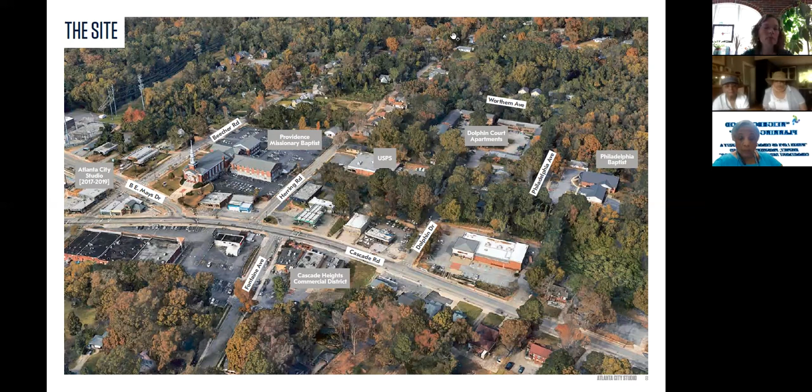This ties back to the site, which is really the Cascade Heights Commercial District. As we think about housing, how are we also ensuring the continued success of this commercial district? It was great to see so many businesses open their doors while we were there, and we were happy to play a role through our storefront redesign program. As you think about growth and our other successful commercial districts throughout the city, what role does housing play? That was another question we were asking ourselves.

The concept here - this is a diagram on slide 10, and I'll do my best to mention slide numbers as we go - is understanding how the commercial district works today. In the middle of the diagram is an icon of buildings representing the commercial district. Cascade Road is the major corridor passing through, surrounded by amazing single-family residential neighborhoods, with Greenwood Cemetery there as a reference.

If we look at other commercial districts around the city, one thing that really drives the success of those businesses - and I'm sure many of you have heard this - is rooftops. That's difficult when you're only talking about single family. So what we were looking for was what element of multifamily could be introduced in the right way to help ensure the success and continued growth of that business district. This is an idea that proposes how that could work.

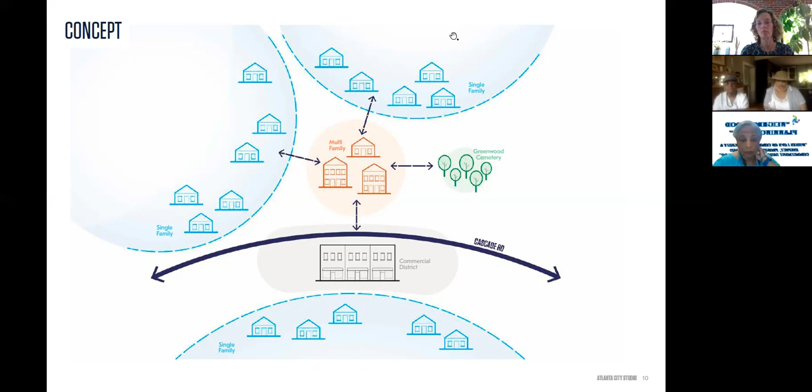This all started when we were in the studio. The Cascade Heights Community Development Corporation - and I'll pause here to let one of their members speak - was very interested in advancing this, and spent a lot of time over summer 2018 understanding how the commercial district works, how it's put together from an urban design standpoint, how the streets work, and what housing types exist. Thinking about the first statement of Cascade Heights as a community in a park with tree canopy, how are we looking for new housing options in a way that protects trees and really protects the identity of the community?

As we worked through those ideas, starting in the first part of 2019, we held a number of meetings similar to this one, only in person in our studio space, which we miss a lot these days. We did one specifically with the property owners north of the commercial district, where we focused the design recommendations, and a couple with the community at large to introduce the idea and hear people's feedback and comments on the design ideas.

A lot of that feedback fed into refinement that brought us to the rezoning we were proposing earlier this year. It's something we've worked on for a long time, and while there have been comments on both sides, I feel it was generally well received because it was so rooted in the community's plans and something we'd spent a lot of time talking about. We're happy to continue having these informational sessions because we want to make sure everybody hears this.

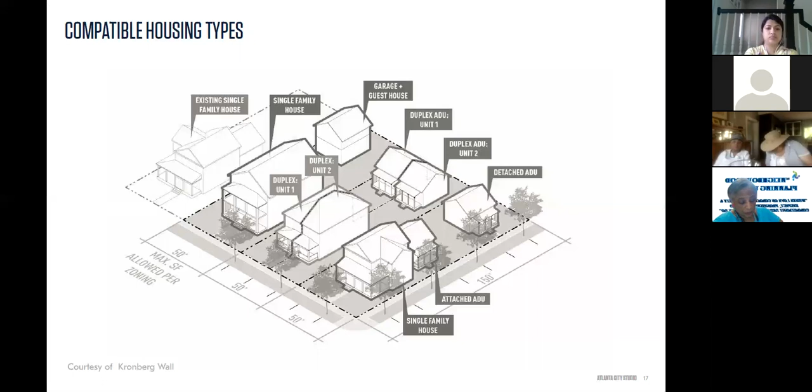Moving on a little bit to visible front doors, there's a relationship to how all of this works best. And I think for a lot of people on the call, this is probably going to seem almost silly to talk about, but neighborhoods work best when you have front doors facing front doors. It's kind of the thing that makes the active street front. It aligns all of the driveways. It dictates where the trash goes. It all works pretty well. And for the most part, we do that. That's been a common planning technique, subdivision technique for decades, if not centuries.

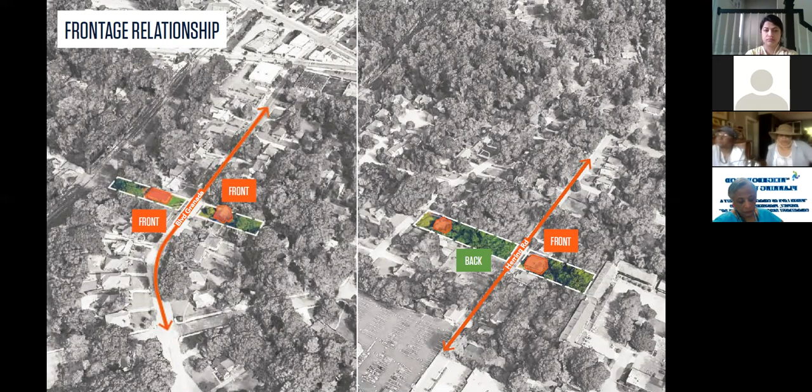The problem is in Atlanta, and some of it's due to topography, some of it's due to just the unfortunate history of zoning, with some of it, we're not going to beat around it, some of it's racial motivations. You find that we have fronts facing backs, and the issue that causes is that you basically have incomplete blocks, and you have whole sections of streets where you don't have eyes on that, and it kind of falls into no man's land, and we get into issues of always having to rely on code enforcement or somebody else to deal with these, where at the very beginning, if we could just get this very simple condition set up, then it all works much better.

Kind of highlighting one of those issues is Herring Road, and we'll get more into specifics about this later, where you do have front yards facing backs and some really deep lots on those properties between Herring and Beecher, and you can kind of see what that condition looks like.

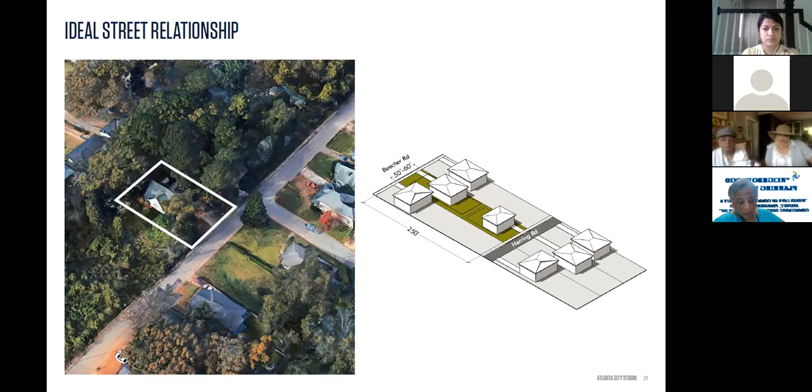Ideally, what you would have is fronts facing fronts, and actually, on Herring Road, it's not all fronts facing backs. There is one little house, I think at 2337 Herring Road, that kind of figured out what we would propose happen here, and change some of those really deep, long lots, and correct that frontage condition. It's a condition we see throughout our city - it's not uncommon, it's just that we're actually trying to find ways to correct for that here.

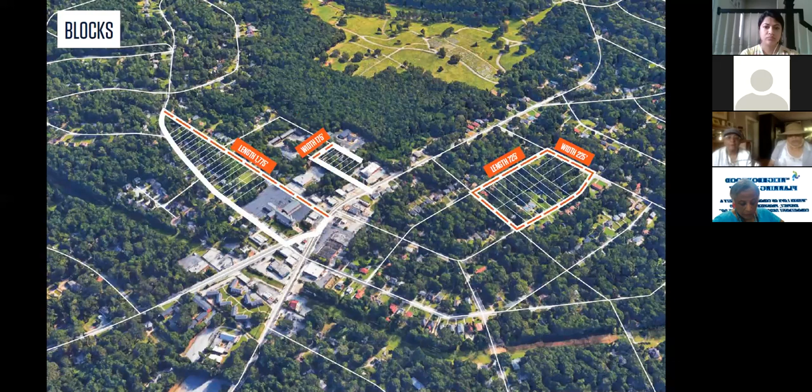Here we're getting into a little more depth. We're on slide 24, where you can actually see the property lines. If you look to the right hand of the screen, a block that's about 700 by 200 shows how you're able to get those nice standard lot sizes where the backs face the backs. Then on the left-hand side, you see Herring Road, where you have a really long block with a lot of backyards facing - that also just doesn't, it could be a better walking experience along that street.

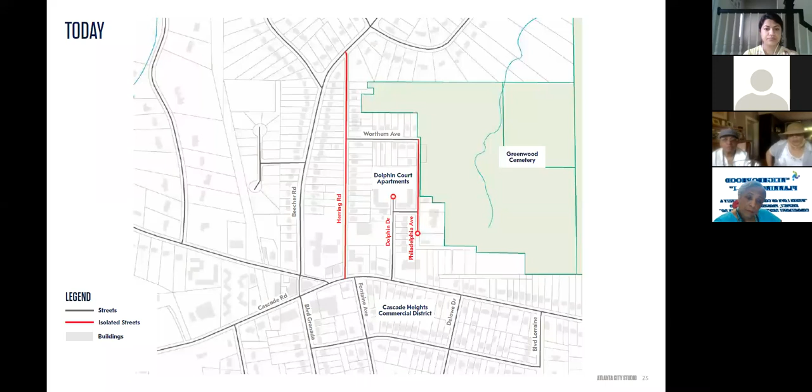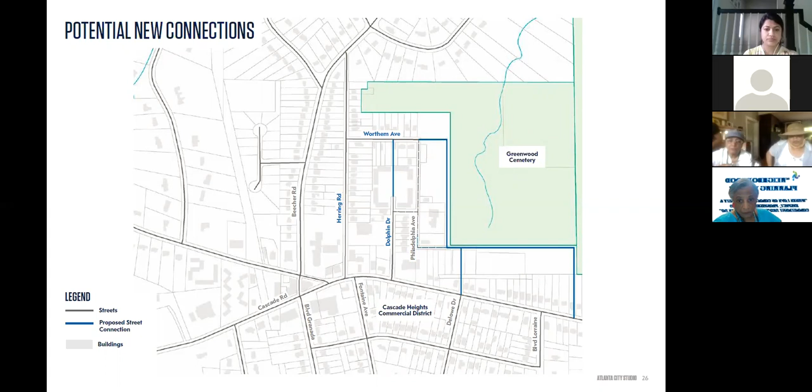So what we're thinking about, and this is maybe getting ahead of ourselves a little bit, is understanding how these streets work today, where you've got these offsets and weird disconnects, and really thinking about, on this next slide 26, the blue streets here - where might you have an opportunity to extend streets or maybe even build new ones that set those block sizes and shapes up to match the rest of Cascade Heights and create opportunities to establish a better pattern for housing as well as those front-to-front relationships.

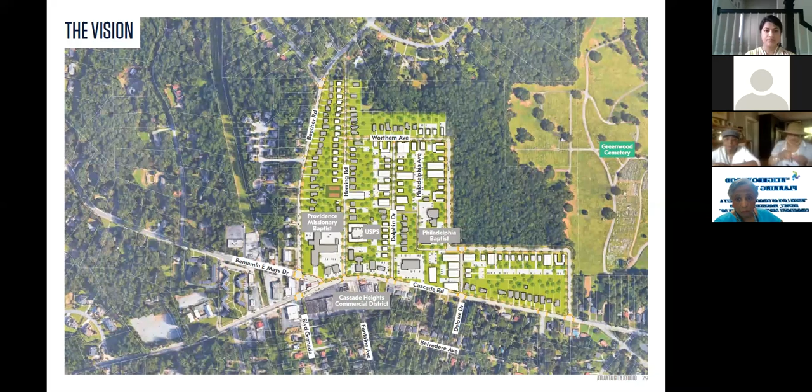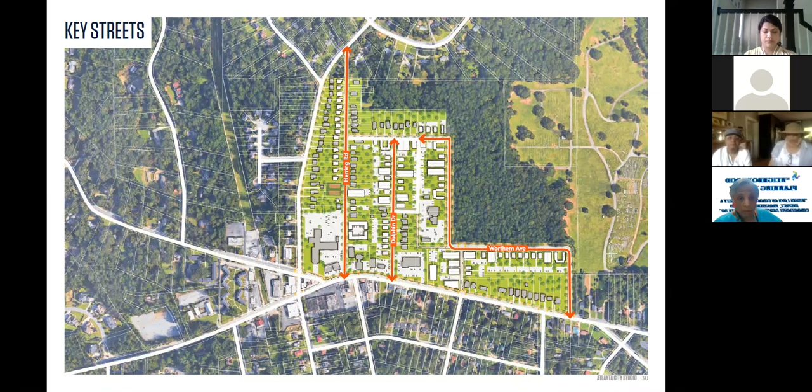I'm going to break this into some pieces and talk through it. I got ahead of myself a little bit on slide 30, but we're just showing those big street ideas. Herring Road is still there, but we have ideas of how you correct that front-to-front condition, the extension of Dolphin Drive to Wortham, and even the idea that Wortham could be extended and brought back all the way to Cascade Road for some really big ideas about the park.

We've broken this into steps, and some people might jump to calling these phases. This is not a master development plan. We are not a developer. We're not starting this tomorrow. This is just an idea of how this could work.

We tend to think of these things in bite-sized chunks. If you were to start somewhere, what's the low-hanging fruit? What's the easiest part of this? What's the hardest part? What are the biggest lifts? If you're taking a test, don't start with the hard questions first. So we tend to think about Herring Road as being the biggest first opportunity for this.

We also have some ideas as you get closer to the commercial district. We talked at the beginning about those big multifamily types, the apartment buildings, four stories over storefronts. If you really wanted to do those, that really wants to happen within your commercial district, looking for the big properties you already have down there.

There was a lot of discussion about, well, what if the Postal Service leaves someday? Maybe that's an opportunity for that, and that makes a lot of sense. You put the most rooftops or the most housing units closest to the core, and then step down the scale of the housing types as you get into the single family neighborhoods.

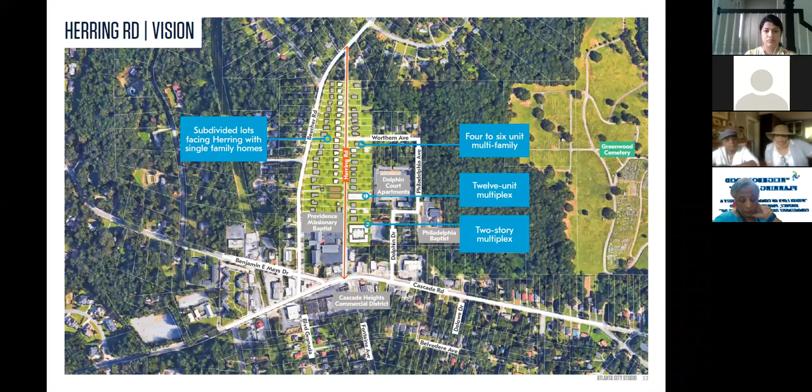Switching to slide 33 and seeing the illustrative or rendered plan over the top, you can see how that works. There's an opportunity for properties between Beecher and Herring to be subdivided or split into two properties. We'll talk more in the second part about how that could work, so you get another row of single family homes, just like our friend at 2337 Herring Road who already figured that out. We've been trying to figure out how they pulled that off, but it sets the pattern we're looking for.

Then maybe in the areas between Herring and Wortham and Philadelphia, you go to the next increment of housing, those duplexes and quadplexes we talked about, and even something up to a 12-plex if that's what the neighborhood wanted or what the market was ready to bring to the table. We're not necessarily saying we've figured out every parcel and every building, but there's flexibility that could be done with zoning to allow some variety, and some restrictions if that's what we want in place.

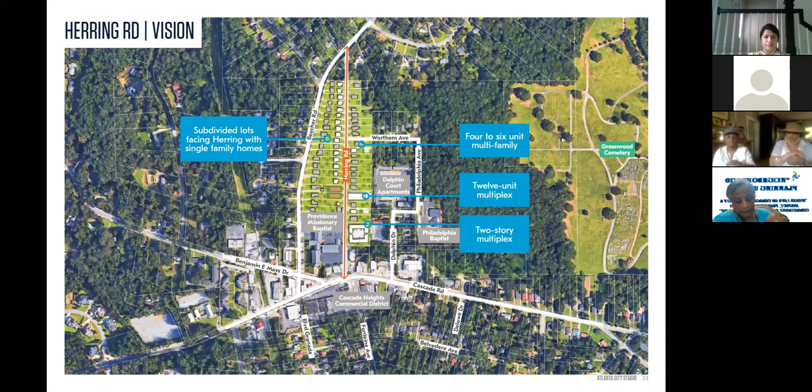Getting into the second idea: how can we better connect Dolphin Drive to the neighborhood? This looks closely at the Dolphin Court Apartments and how it presents this really awkward break in Dolphin Drive between the back part of the neighborhood. There's an idea that, given how the apartment is split into these four corners today, and with vacant properties between Dolphin Court and Wortham, there would be an opportunity to extend Dolphin Drive and create that first new block, along with new parcels and additional housing types alongside it.

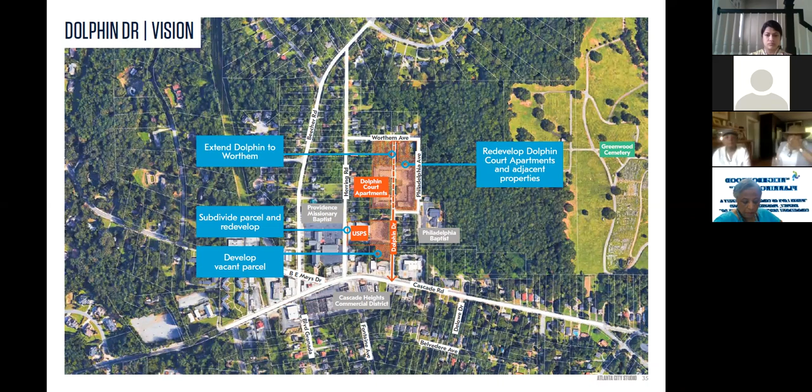Here you can see it in the rendered plan, where the old form of Dolphin Court goes away. This is kind of the middle piece of that.

There's obviously conversations that would have to happen with the ownership of Dolphin Court. We did try to reach out with them as a matter of this process but could not get in touch with them. We understand there's new ownership now, so we could restart those conversations.

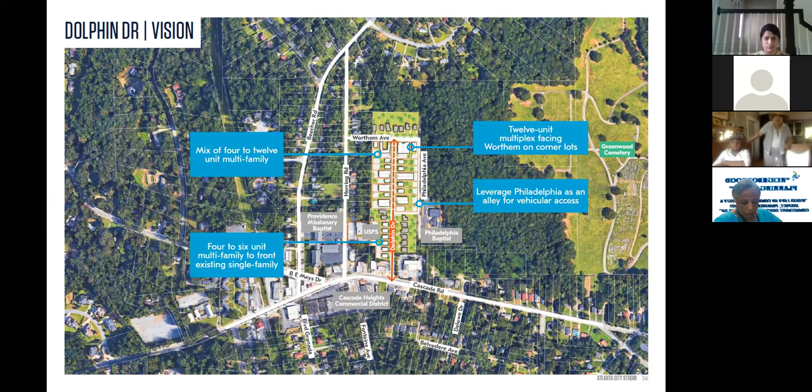But that's kind of the second step of figuring all this out, and it's not at a point right now where we're proposing any rezonings, it's just sharing the idea of how this could work. The last piece, which is the really ambitious piece, is how could we connect Wortham Avenue through the Greenwood property while also protecting the existing tree canopy.

I will say there was some representation from the cemetery as part of this. To my knowledge there's not any conversations about changing hands of land, but it's just thinking 10, 20 years ahead if growth really does happen here. I'm aware we've just hit a recession, and market cycles are always going to be with us, but thinking ahead as far as we could, if there were additional opportunities, what might they be.

I'm on slide 38. That connection extends off of Herring Road, comes into the Greenwood property, turns south behind Philadelphia Baptist Church, runs along the backside of properties parallel with Cascade Road, then turns south and connects with Cascade Road on some vacant property there. The idea is creating new blocks and new parcels that would allow the mixing of duplexes and triplexes, those missing middle housing types.

I will say we've had some thoughts about what the zoning category could be. I'm going to dip my toes into the zoning realm here. You may have heard about the MRMU zoning, which was introduced just a couple years ago to try to bring some of those back. That may be the tool for this job, but we're not quite sure. There are certainly other zoning categories we could look at.

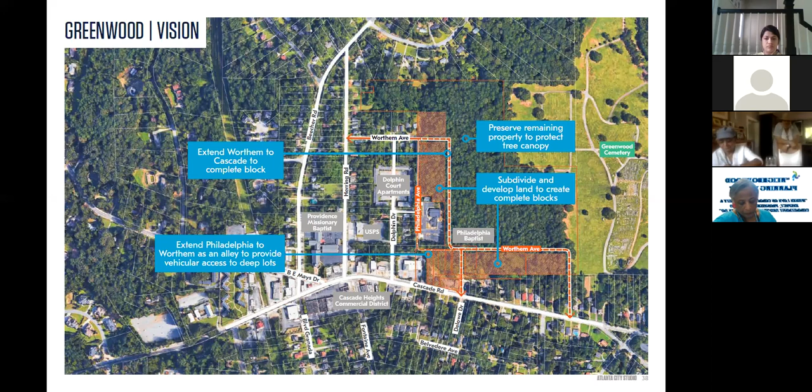For us, that's kind of step 2 or 3 of this process, something we'd come back with, and whenever we're ready, do informational sessions like this one and come to the NPUs to talk more specifically. But again, this is an idea thinking decades ahead of how this could really expand and provide more housing in the commercial district. You can see this on slide 39.

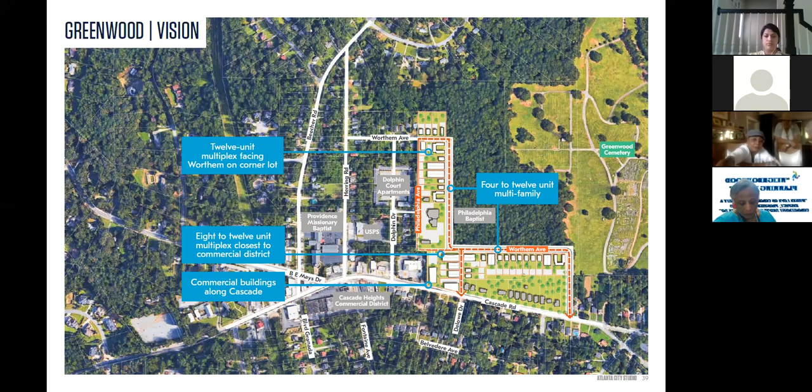I'll pause there for a minute. I think I'm taking a really long time because I see it's 4:45, and I want to be respectful of everybody's time. We'll see how the questions go. This is new territory for us. I will say we had said 4 to 5, but we have this Zoom room until 6, so if we need to extend to spend time on this, we're willing to do that.

All right, so where are we starting? Thank you, Kevin. I've collected a few questions through the chat. Two of the questions, one from Leonard Smith and one from Dre Virgin, are related specifically to part 2, where we're talking about the rezoning. I propose we hold those questions until we've gone through those slides, as you may answer them throughout the presentation. But there was one question from Dre Virgin about the Dolphin Court apartment that's more related to part 1: has the owner of Dolphin Court apartment taken a position on the rezoning, and what is the latest temperature on their willingness to sell and redevelop in line with community goals?

Yeah, certainly as part of this process starting in 2018, we were very interested in talking to them, and we went through a number of channels to try to connect with them. I think we finally, through property records, had a number of phone numbers we tried to reach out to, left a number of messages, but unfortunately were never able to connect with them and get them involved in the process.

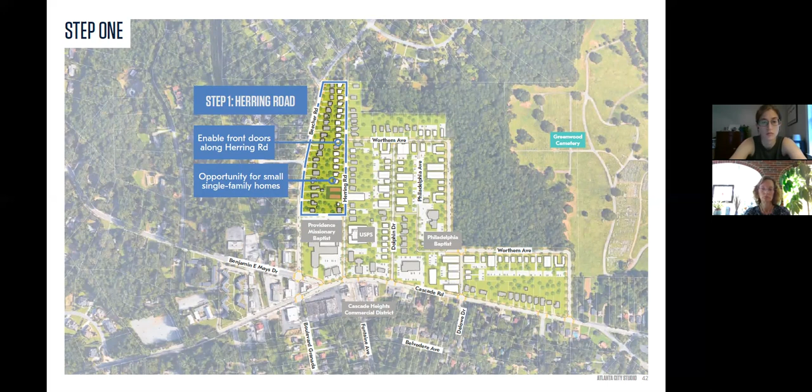One thing to note about all of these properties - there's 23 in total in the area we're looking at. The question came up a lot in the rezoning process of where were the homeowners? There weren't many of them at the meetings, and this is to talk a bit about why that's difficult.

Because in some of those properties you do have resident homeowners that live there, but in a lot of cases we actually have rental properties where getting to the actual owner has been a challenge, and in some cases they're owned by corporations. So for a fair number of those, we're dealing with properties where it's actually not the homeowner occupant of the site. I am going to stop for a minute and check with Vanessa or the rest of my team to make sure I got that accurately, because that was a new piece of information we've added for this.

Yes, that is correct. Given our data on homestead applications as well as property owner information, we've gathered that about 56% of the properties are owner occupied, and the remaining are evenly split between homes owned by individuals but not under homestead, so presumably not owner occupied, and properties owned by corporations.

So again, you probably remember from the very beginning of the presentation, I'm on slide 44, we used Herring Road as an example for the kind of urban design conditions we like to see, where we have front doors facing front doors, or front yards facing front yards. If you look at the diagram on the right-hand side, we currently have homes on Herring Road that are facing very deep backyards from homes built and facing Beecher.

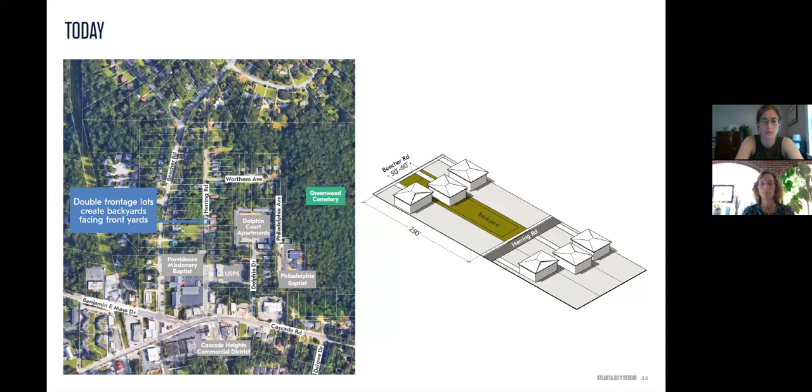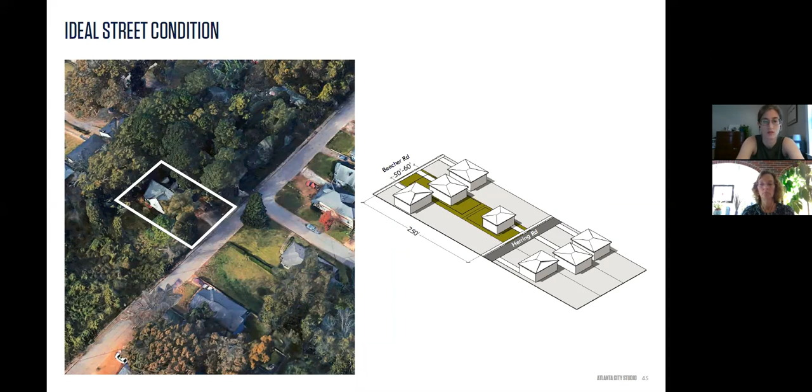The ideal condition is best exemplified by the property at 2337 Herring Road, where they actually did what we're proposing - split, subdivide, and build a house with its front yard facing the front yards of all the other houses on the other side of Herring Road. So we took a clue from that - could we make that work? Could we do more of that? Because that's what we would like to see, and that's what solves the weird condition of having these deep lots.

The way we're proposing to do that, and this is the proactive rezoning that the city is the applicant for, that we brought to NPU I and S, is to do a change of zoning from R4 - all of those properties are R4 today - to a different zoning category called R4B.

What's the difference in that? The fundamental difference is what we call a minimum lot size—what's the smallest property or parcel that you can have in that zoning category?

Under R4, the smallest a property can be is 9,000 square feet, which is a really, really big site. So the reason none of those other parcels today could actually subdivide and split is because if you split them right down the middle, they're all much smaller than 9,000 square feet. It doesn't work—by R4 zoning, you'd be out of conformance, and we would not allow that to happen.

But if we were to change those to R4B, the minimum property size is much smaller—2,800 square feet, about a third of what R4 allows. They're smaller properties, but about the same size as what you see on 2337 Herring Road. So you still get a front yard, a backyard, and a size for a single family house similar to the form and character of the rest of the neighborhoods in Cascade. It's just on a slightly more compact footprint.

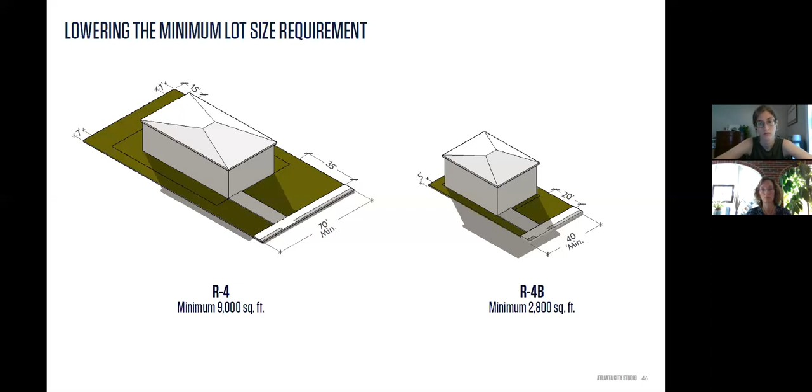We went through and tested all of these, and with the exception of, I think, the very tip of the property, this is a viable solution. That's why we're suggesting this is the course of action.

So if we were to do the R4 to R4B conversion as we propose, what does this do? What happens tomorrow? Just like we were talking about, it lowers the minimum lot size required, and that's it. It changes those, but it doesn't make anything non-conforming. It doesn't mean somebody has to get out of their house. It doesn't mean anybody has to start development immediately.

All it does is allow the homeowners that live there today, or the property owners—since not all of the homeowners are occupants—to go through a subdivision process. They would come to the city, and we'd be willing to work with any of the property owners to go through that process, prepare a new parcel plan, create that parcel, and then it could be sold to a home builder or developer to build that house. That's pretty much the only action the homeowner would need to take.

If a homeowner doesn't want to take advantage of it, then they don't have to. We're thinking years ahead, putting options on the table to get the condition we ultimately want. So while it doesn't necessarily make the change overnight, it at least makes the change possible.

The benefits we see with this—over time, as we hopefully get more properties like 2337 Herring, you start to get those front doors, and it starts to feel and work much more like a neighborhood street that's really a valuable connection to the commercial district.

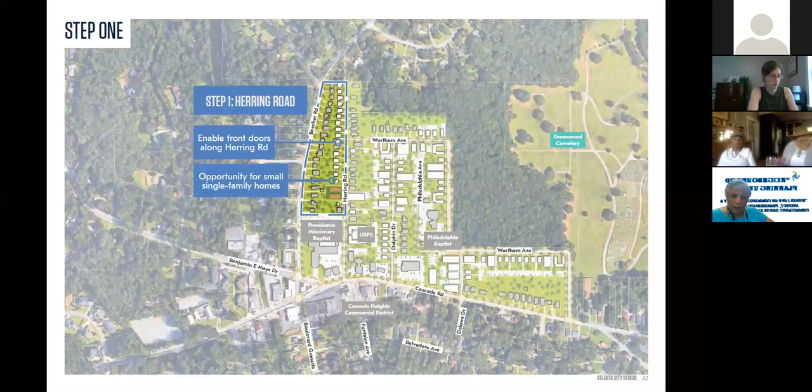NPU-I will still go to NPU-I. They will still be allowed to review this and comment on it because they are adjacent to that. We've been talking to the chairperson, Ms. Glover, over the last couple of days via email. So when we do get ready to go back to NPUs, we will be going to NPU-I and presenting again, as well as NPU-S.

Thank you, Kevin. And just to add to that, we have some more technical information. If and when the rezoning is approved and a property owner is interested in subdivision of the property, that also has to go through the NPU process for review and comment. So that is an additional step the NPU system will be involved in even after the rezoning process is completed, if that is successful. That's a great point, thank you for bringing that up.

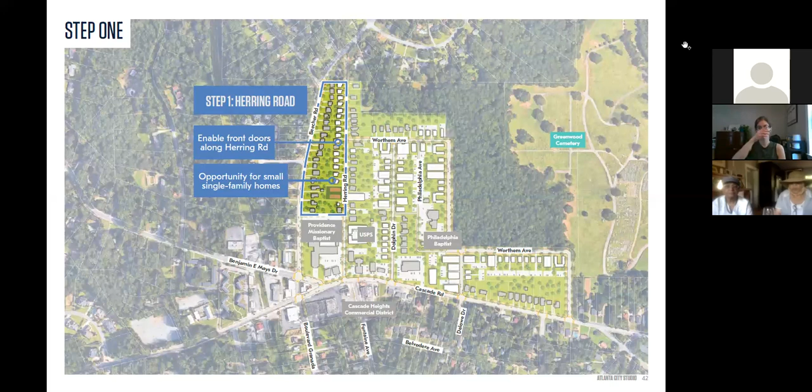Yeah, no, that's fine. I was trying to figure out—I think most of us, certainly from Beecher Hills, drive down Herring—so trying to figure out what it would actually look like to get all of the new houses on that side of the street, if they're going to follow, because I think the infill house is closer to the street than the houses on the left-hand side, the post office side of the street. So just trying to see what type of continuity would be put in place, if that's even part of the zoning, or if that's just more of a detail that would be put in place for that street.

I just pulled up slide number 46, which shows the comparison between R4 and R4B. Shashmita, feel free to correct me if I get this wrong, but R4B has a 20-foot minimum front yard setback.

That is correct, yes, 20 feet setback. But if the property owner wants to match the front yard setback with the existing infill house, they can do it based on the regulation that says you can match the setback with the majority of houses on the block. We only have one house on the block, so technically we can match the setback for the new house that will be proposed next.

And I did get a response from Ms. Walker. She said her question was answered, and her concern was that the one line for NPUI had been removed. Would you still come to NPUI since we submitted a favorable recommendation? Yes, we will go back to NPUI for review and comment when we are ready. We don't have a date yet for when we're going to go back, but we will go back to NPUI when we do.

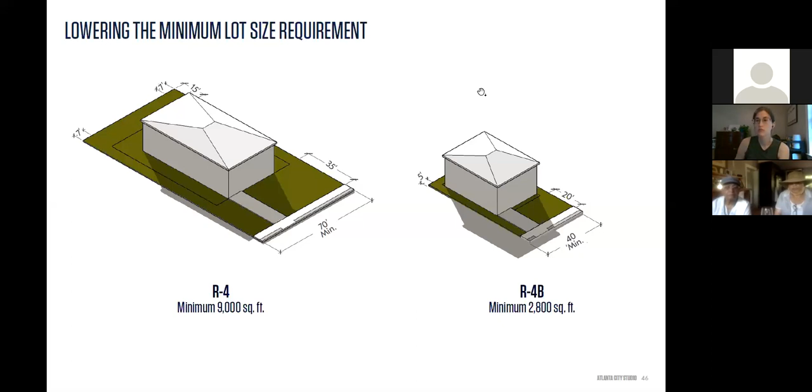I believe those are all the questions we have on the chat, but I don't know if anyone had their hand raised that would like to speak as well. We currently have no hands raised in the participants section, so we're good to go there.

Okay, we have one more question that just came in from Karen Babineau: can there be a requirement to match the setback of the existing house? No. So the setback requirement is the 20 feet minimum for the zoning, and each individual owner can choose to match the existing house, but it's not a requirement. Yes.

I would add too that those lots are going to be pretty small, 2,800 square feet plus or minus, which is not a very big lot even though right now they seem that way. That will help reinforce these not sitting way back from the street. The 20-foot minimum certainly helps, and the existing pattern helps, but you can only go so far back with the layout of a house before you run out of property.

Ms. Babineau, you are welcome to speak further on the matter if you would like. No, thank you, that was just a question because people are worried about the uniformity of the existing house, so that should be, I guess, the standard for the rest of the infill if people choose to do that. That's why I asked that question.